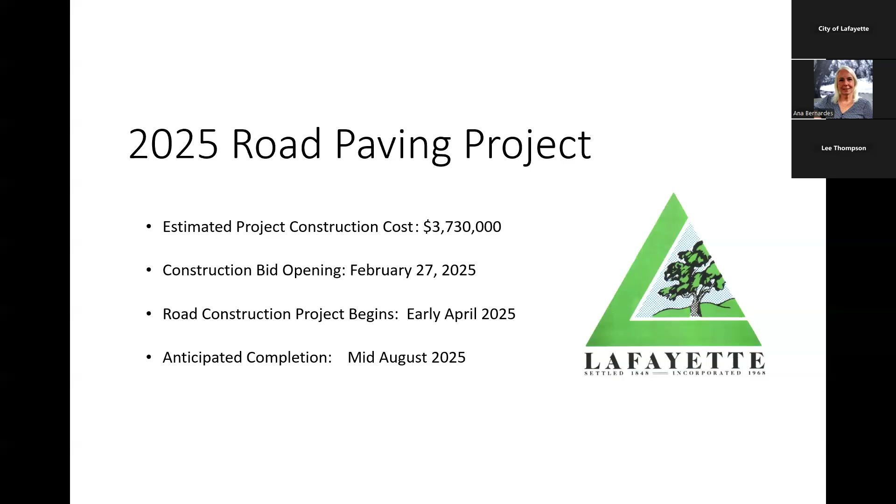This project has an estimated construction cost of $3.7 million. We are going to be paving two major streets, St. Mary's Road and Mount Diablo. We will go out to bid next month with a tentative bid opening on February 27. We are estimating that we will start construction in early April and complete the work in mid-August.

Let me introduce our team. This picture you see is Tim Clark, our associate engineer with the City of Lafayette. Tim will help me on this project. A little bit of a brief about Tim: Tim joined the City of Lafayette in March of 2020 and has worked on several CIP projects. Tim's phone and email are listed here on this slide, but you can also find his contact on the website. Here's Tim on one of the pavement projects he worked on, with level in hand, checking the cross slope.

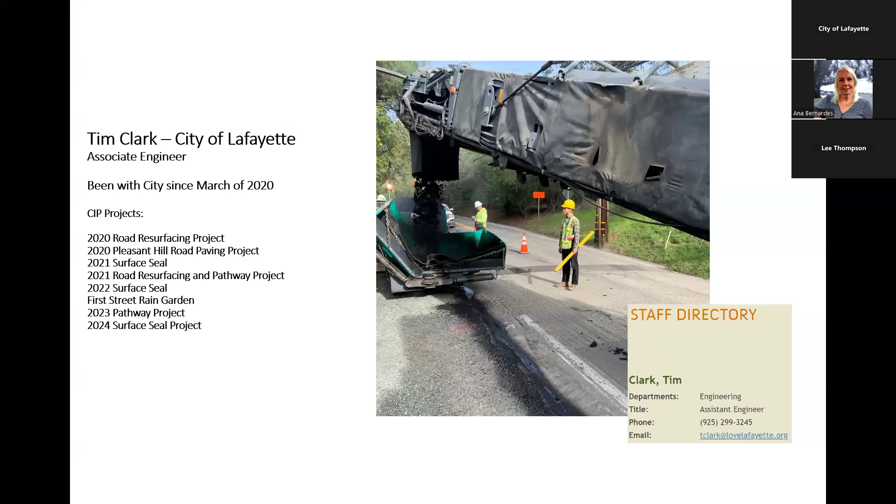So there are two streets planned to be paved for the upcoming summer: St. Mary's Road and a section of Mount Diablo Boulevard. St. Mary's Road was going to be a paving project in 2023, but because we learned that East Bay MUD was replacing their main pipeline in the summer of 2024, we postponed the project to the summer of 2025, the next summer. We already had a public meeting about the St. Mary's proposed improvements back in 2023, I believe, when the plans were at about 25%, and we are refreshing minds with this set of plans at this meeting. The project plans are close to 98% to 100% developed, so we're getting pretty close to going out to bid.

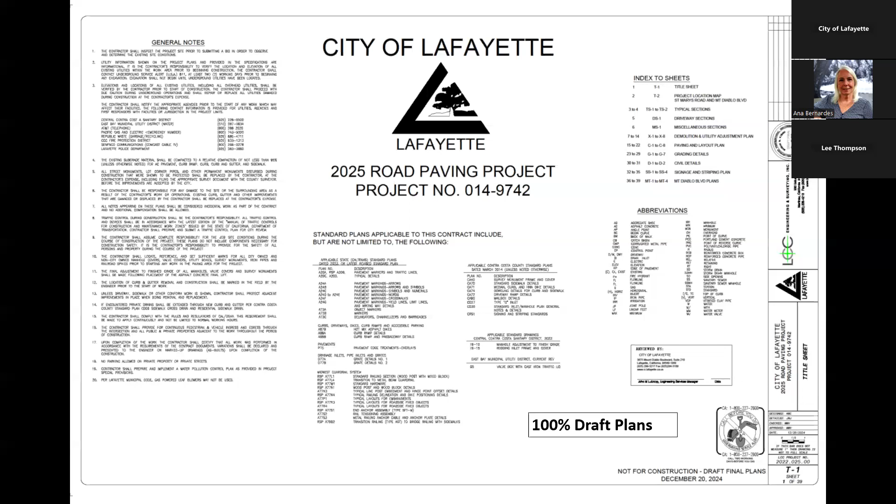Some areas will be mostly overlaid, and that means putting new asphalt on top of the existing one. We are overlaying about 2.5 inches of new hot mix asphalt over the older street. Before you overlay a street, there's some prep work that needs to get done. This involves identifying the areas of severe pavement distress and marking the road where we will need to do a repair deeper than the 2.5 inch overlay. If you drive on St. Mary's tomorrow, you will notice a lot of white paint demarking these areas of future dig outs, or what we call base repair. During construction and before the overlay is laid, the contractor will grind these areas and fill them in with new hot mix asphalt.

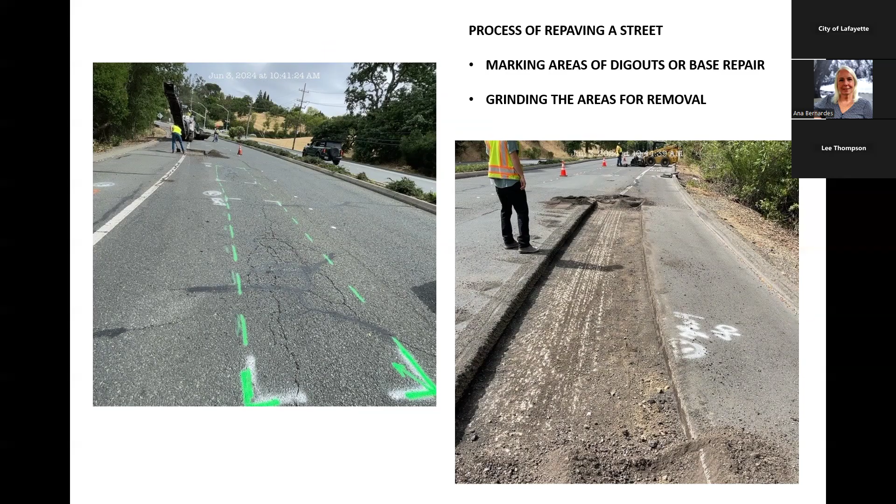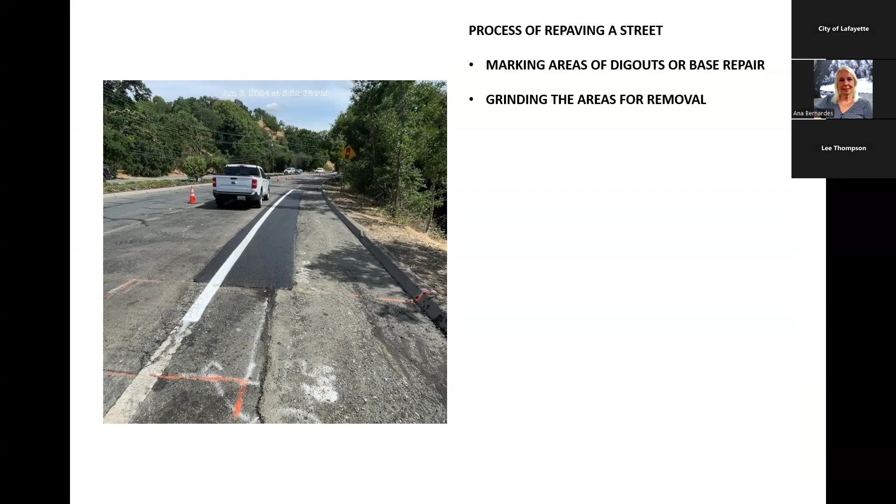I selected some of these dig outs from our project last year on Pleasant Hill Road. In this slide, you have a dig out where the contractor has backfilled with new asphalt, and he has also placed temporary paint striping. So it's like a sequence of the previous one. Before you overlay a street, some prep work needs to get done, like grinding off the existing thermoplastic striping. In the picture on your left, this was the contractor removing the stripe. You can see the stripe almost gone there. It also involves filling in fine cracks in the road, what we call crack seal.

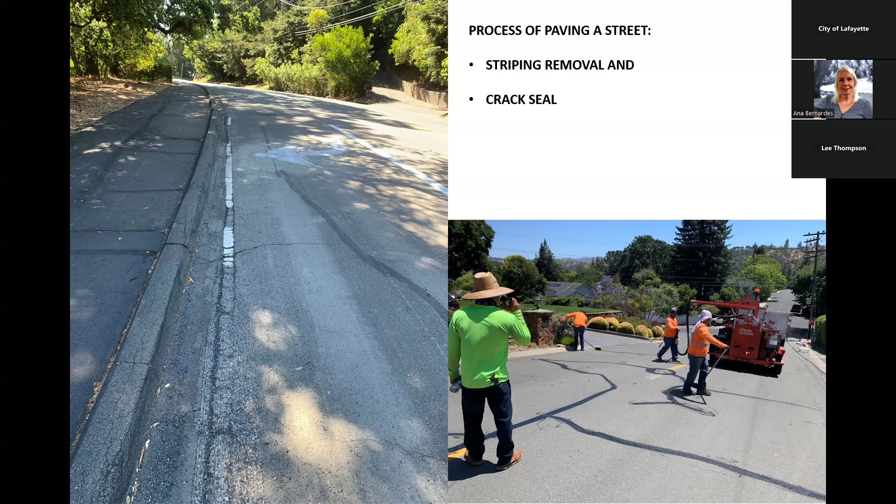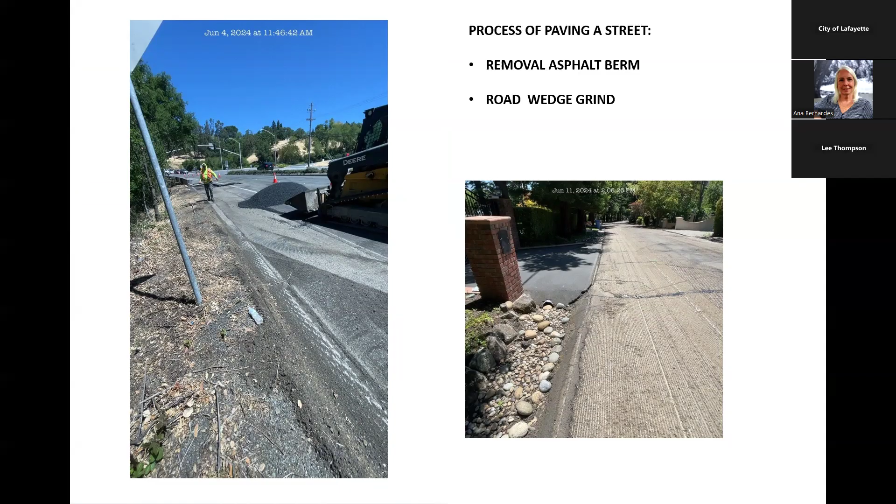Before overlaying the road, we also remove the existing asphalt berms and sometimes do a wedge grind adjacent to improvements that we will not change, and we will conform and match the elevations. So your left picture shows an asphalt berm that has been removed. And then on your right, you have the wedge grind that we did on Pine Street adjacent to improvements that we're not going to touch.

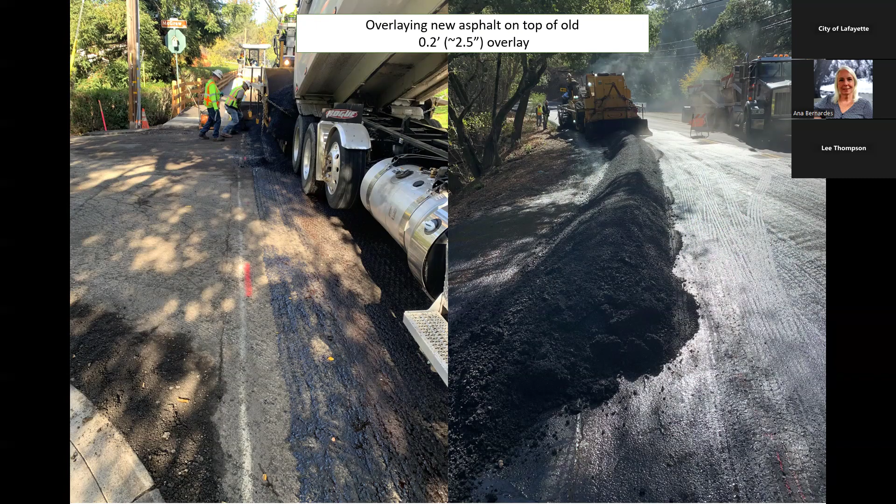So after these steps, we can then overlay the existing asphalt with a new hot mix asphalt layer on top. A sticky tack coat is laid down before adding the new asphalt to adhere to the road surface. So you can see in the picture, normally we have heavy machines, trucks dumping asphalt where the pavers spread it out over the oil surface.

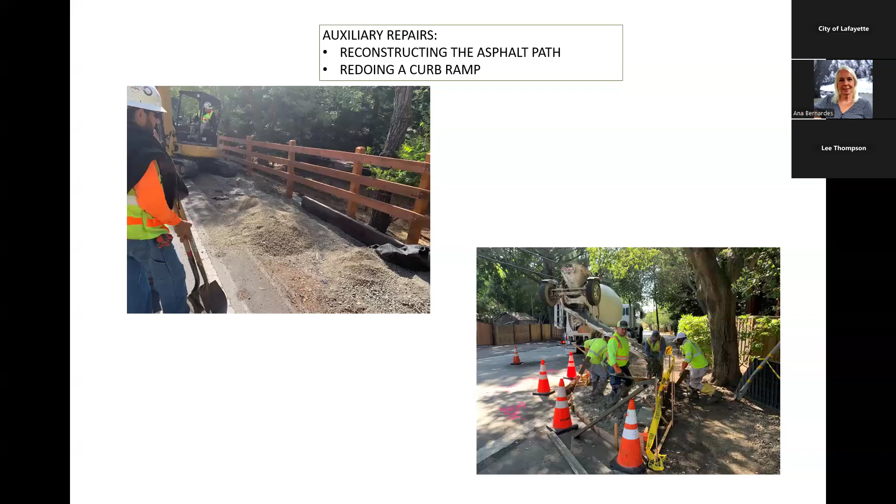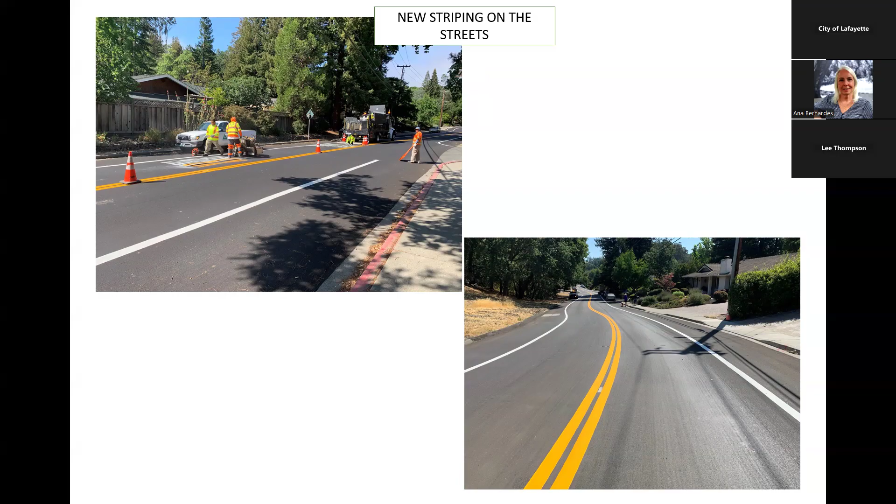And once that is all done, we can stripe the road. So once you have a brand new overlay road, the contractor normally cat tracks and marks the future design striping. And then he also works to pick up miscellaneous items and wrap up the project.

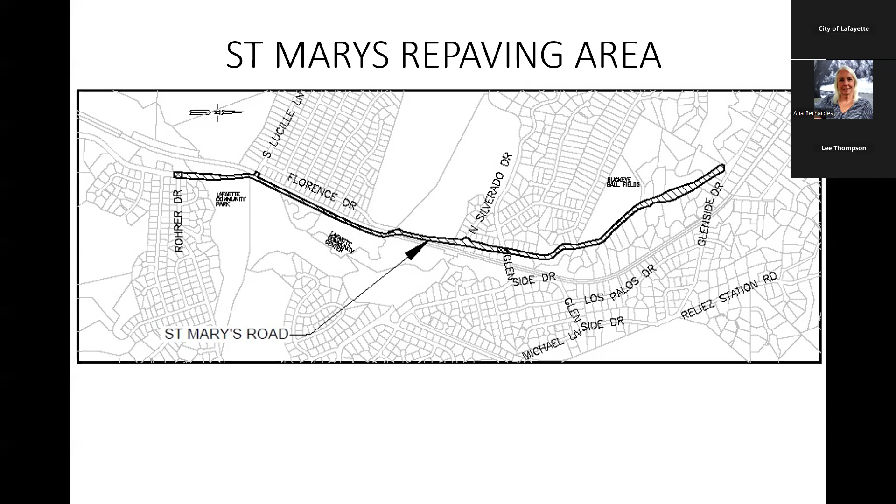In addition, because we do have a bus stop north of that intersection, we're going to construct new concrete bus pads. So a bus can stop right adjacent to this concrete pad, and if there is a wheelchair that needs to be lowered, the bus pad has an ADA surface where this can be accomplished.

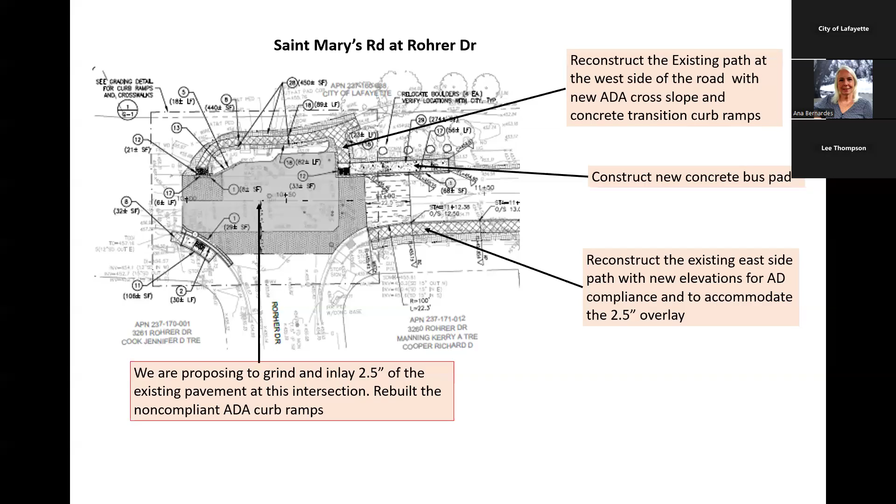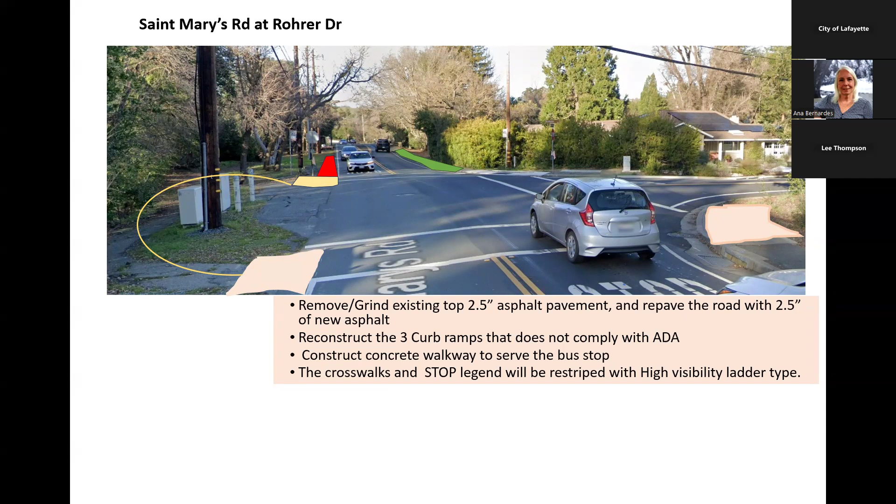So for you to have an idea, I took a picture of this intersection, and we have in green a piece of the path that is going to be redone. The red shows the bus pad, and the tan color shows all three new curb ramps that will be completely reconstructed with new ADA standards. Also, the path I was talking about is the path that comes around these communications cabinets and connects to the west side path that runs along St. Mary's.

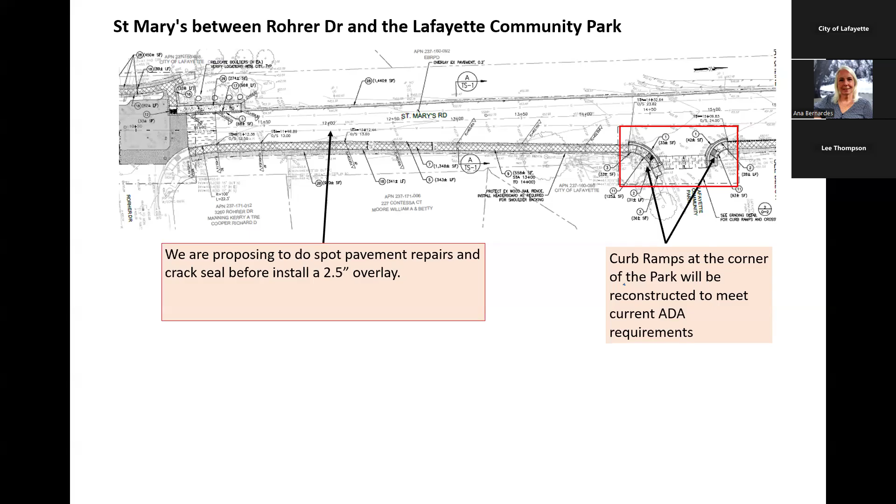So continuing from the park entrance on St. Mary's, south of Lucille, we have a concrete bridge, and our overlay is going to go up to this concrete and then continue on the other side, on the north side. But we noticed that with the overlay, your final elevations are 2.5 inches higher.

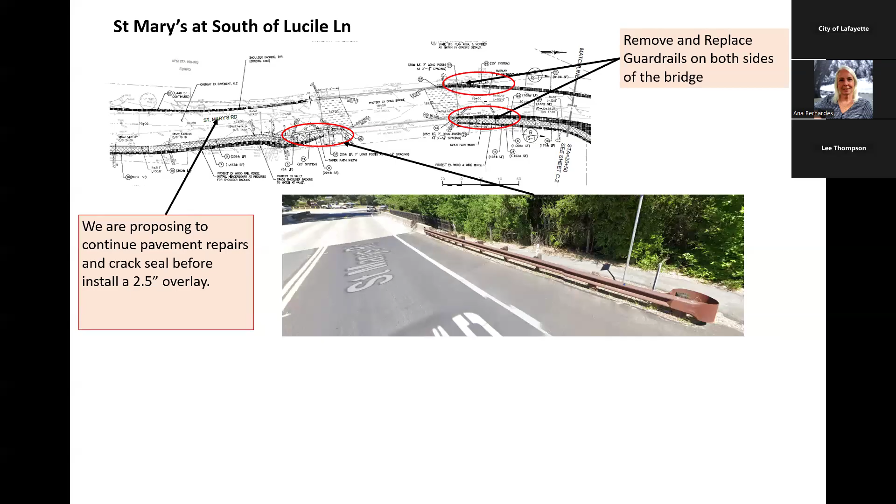So this is a picture of Lucile Lane at St. Mary's, and there's a lot of improvements going on there. So not only are we proposing to continue the pavement repairs and crack seal before installing the 2.5 overlay, but also we're going to construct the ADA curb ramps at the path crossing and continue the restoration of the asphalt path.

So also we have a crosswalk here where we will reconstruct ADA curb ramps. And then this is the path that continues and meets the path over there by Rohrer.

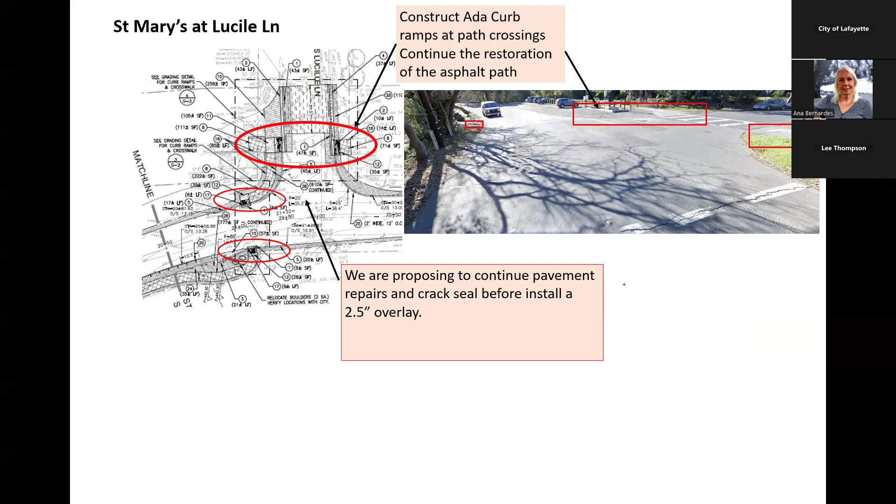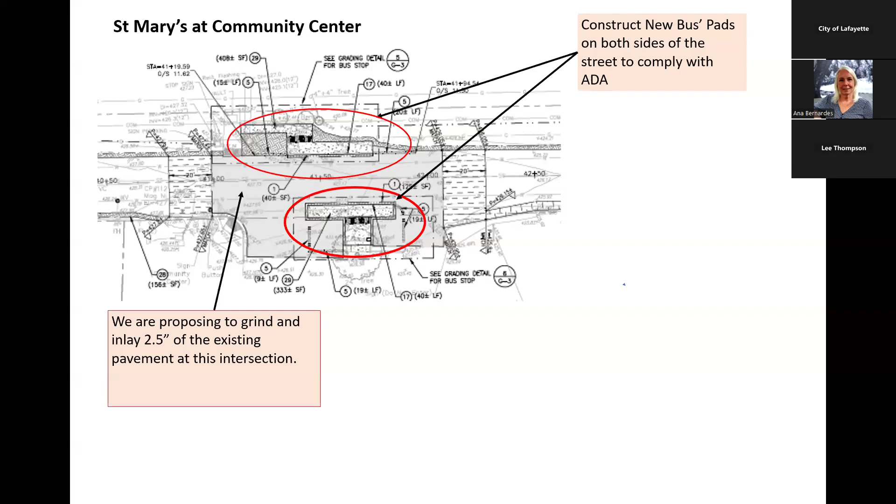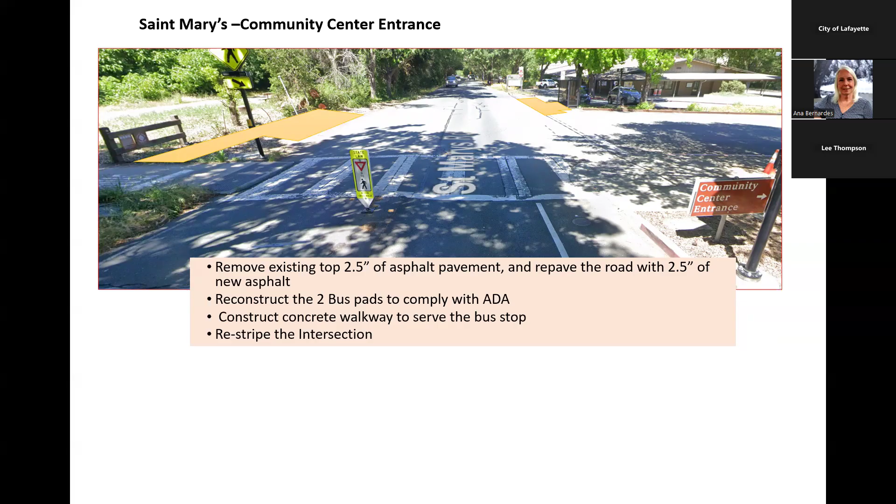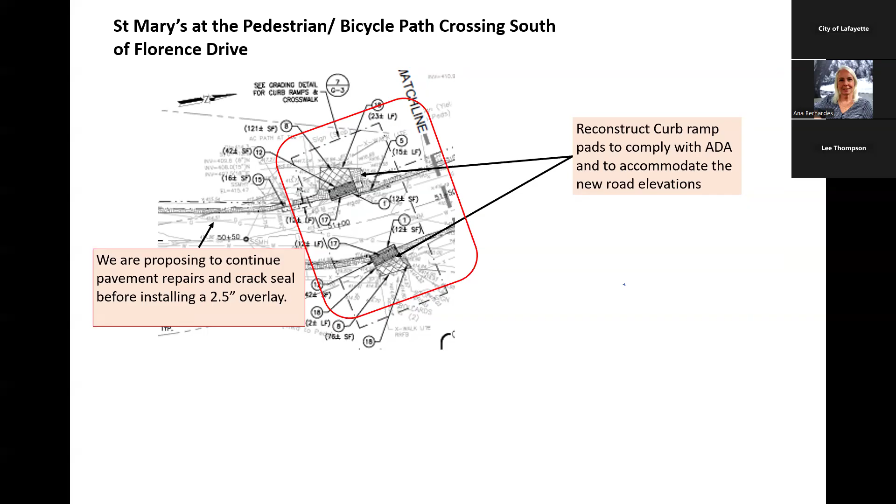So continue north, St. Mary's at the pedestrian bicycle path crossing south of Florence Drive. This is a point where the west path crosses and connects us to the east side. So with the 2.5 inch overlay, we are reconstructing curb ramp pads to comply with ADA and also to accommodate the new road elevations.

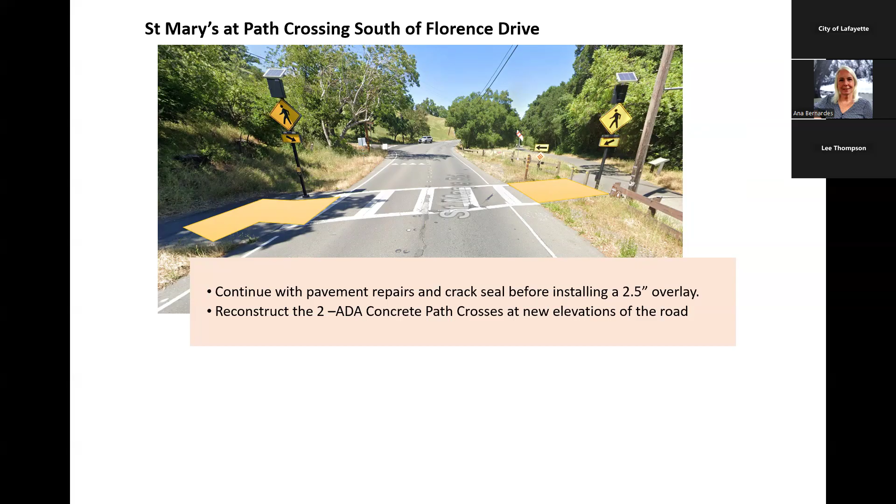So this is again a visualization of the intersection. I'm talking about the crossing of the path, and the sketches that I have exposed over the picture show the future improvements with new ADA concrete curb ramps.

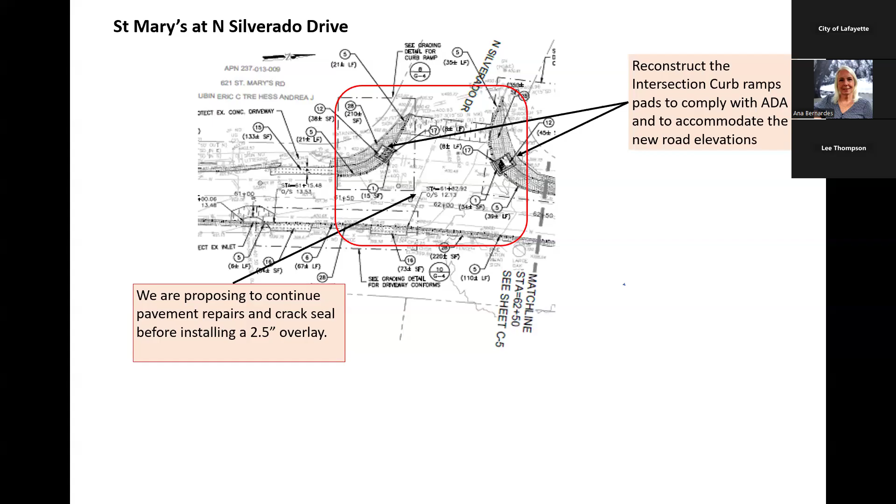So when we are at St. Mary's and North Silverado Drive, again another intersection where we are continuing our overlay, and again in combination with base repairs and crack seal. But we are also reconstructing the intersection curb ramp pads to comply with ADA and to accommodate the new road elevations and connect with the new overlaid path that I'm going to show you in the next slides.

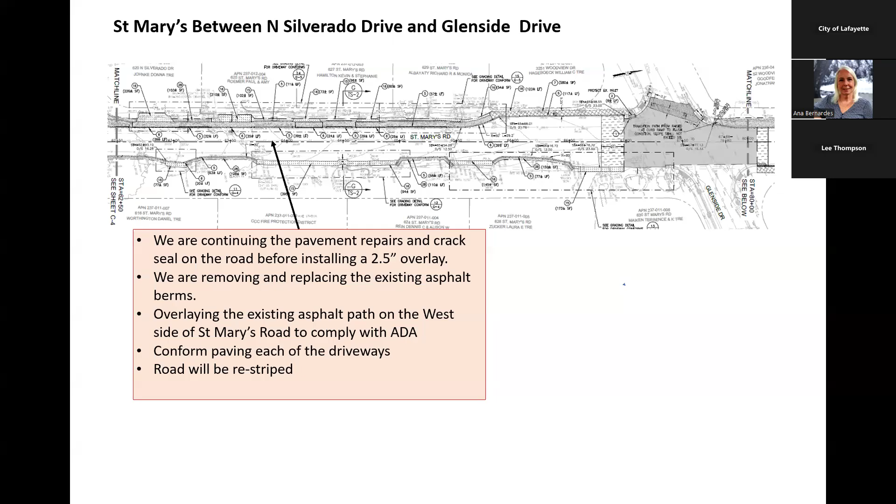As you can see here, this is another visualization. You have driveway entrances. So this is the area that we will be overlaying. I placed a typical cross section so you can understand what we are doing. So this is the overlay, the top 2.5 inches that we are placing over the existing layer. But also we are filling in, installing a leveling course here, so the path cross slope complies with ADA, and it's not more than 1.5% across the slope.

So these are some of the things that we are doing to comply with ADA. So there will be transitions into landscaping and/or driveway conform paving to the existing driveways.

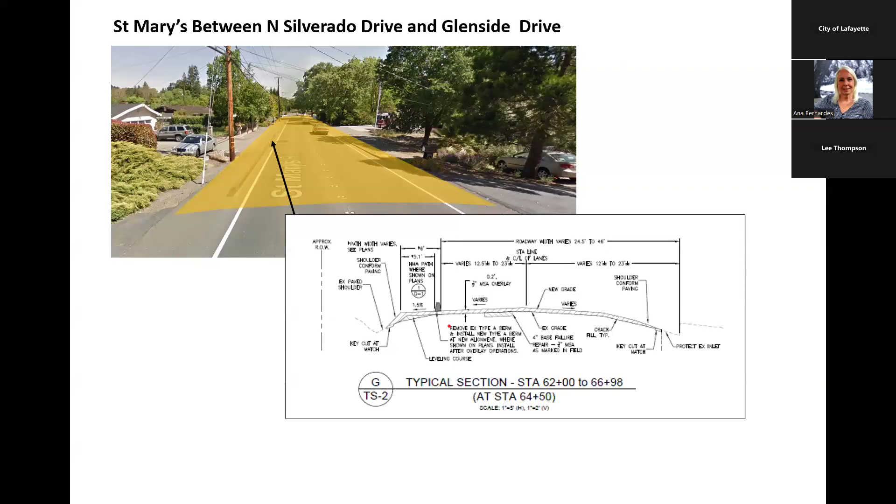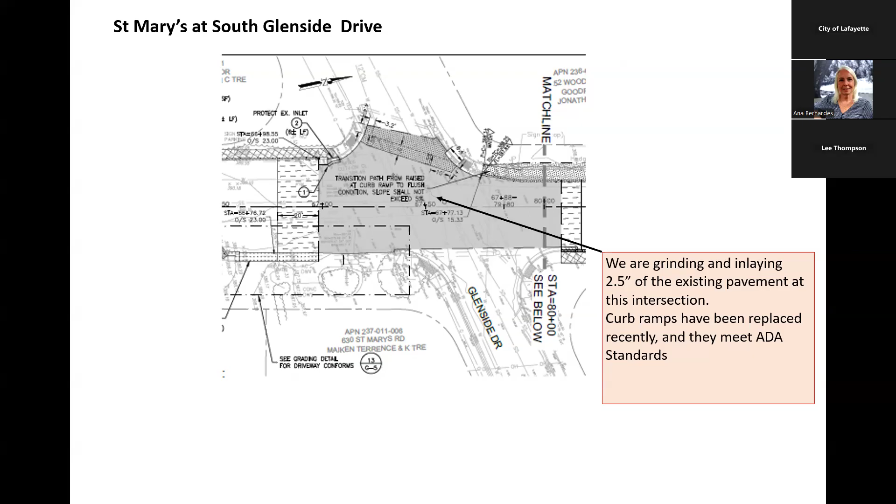So St. Mary's and Glenside Drive. This is Glenside South. We are proposing to grind and inlay 2.5 inches of the existing asphalt. And because these curb ramps have been recently done, the one on the west side and the ones on the east side, we don't have to update these curb ramps to the latest ADA standards. So we'll basically just remove the 2.5 inches and put it back on with a transition to the overlay sections.

So moving north of St. Mary's at Glenside Drive, we are again overlaying the road with spot repairs and crack seal and overlaying the west side walkway with the addition of a leveling course, like the same thing that happens on the previous block. So we end up with an ADA cross slope. We will also conform pave each driveway for the new elevations.

And then I want to mention that there are landscape like bushes and shrubs and trees that have grown out past the existing or design edge of the pavement or pathway, and that they're in conflict with the work. We plan to get these bushes and landscape trimmed back to a point of 1 foot behind the new edge of the pavement or pathway, and to a height of 14 feet above the road. In case some of the plants, such as juniper bushes, exist in the area, this may expose the bare interior of the bush when we do the trimming.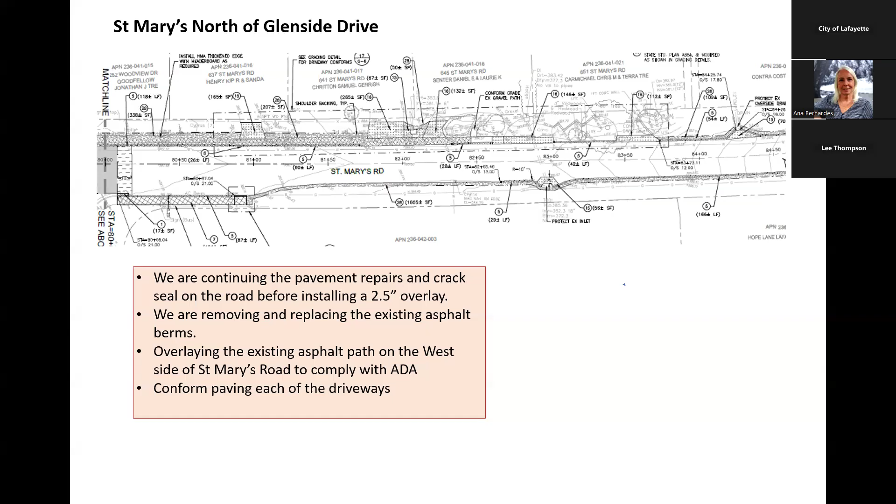If you are concerned about the method to be used in trimming, please get in contact with us. I suggest that you probably hire a landscaper and then do this work in the best way. Normally, pavement contractors are not landscapers, and they just go and cut, and they are not relocating plants or doing the proper care for the trimming.

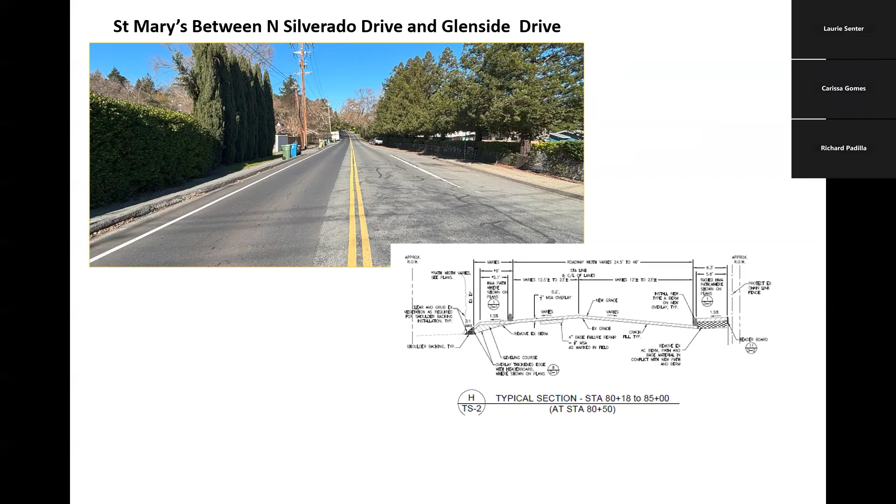So this is again a visualization of the block north of Glenside Drive, and then you've got a typical cross section with the leveling course that we're going to apply to make sure that the path is in compliance with ADA. The asphalt berm will be temporarily removed, and then placed back once the overlay is complete.

St. Mary's at Buckeye Field, so this is going way north past Glenside Drive. Here in front of Buckeye Field, we are doing road repairs and crack seal at the area adjacent to the new East Bay MUD patch before we overlay the 2.5 inches. In the picture on the left, you can see the dark asphalt, which shows the new improvements from East Bay MUD. But on the left side is still the road that has severe cracking, and it will need base repair, crack seal, everything that we needed to do before overlay.

So once the road is repaved, I put a clip of the new striping that you will have there. The contractor for East Bay MUD has painted this left turn. This was almost completely gone before East Bay MUD came there to work, but we worked with them to have this striping done in paint, not in thermoplastic, so we don't have to grind the new East Bay MUD area just to complete the work. So you will see, after we do the dig outs and the crack sealing on the southbound lane and this middle turning lane, a fresh new 2.5 inch overlay and new striping work.

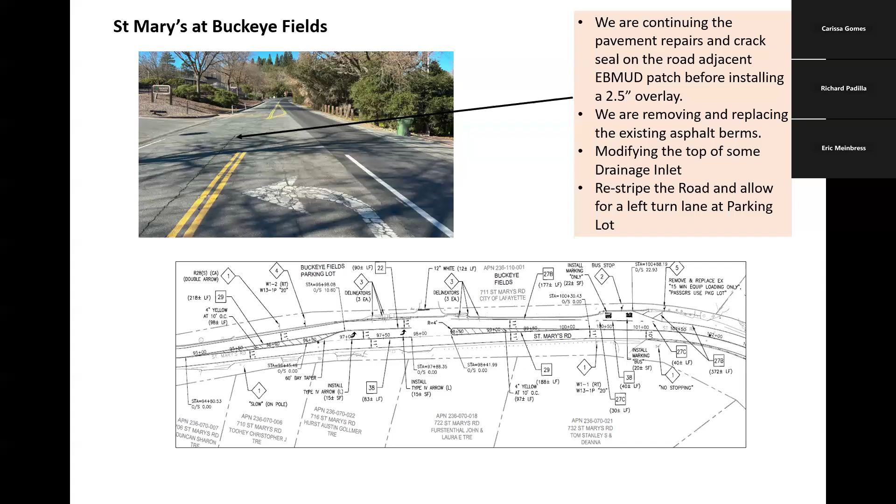So here's the end of our repaving work on St. Mary's, at the second intersection with Glenside on the north side. I did mention before, but between Buckeye Field and this point, we continue overlaying the road at 2.5 inches with asphalt dig outs and crack sealing. We will also remove and replace the two large sections of guardrails to comply with the new safety standards and conform pave at each driveway to provide access to the new road elevations.

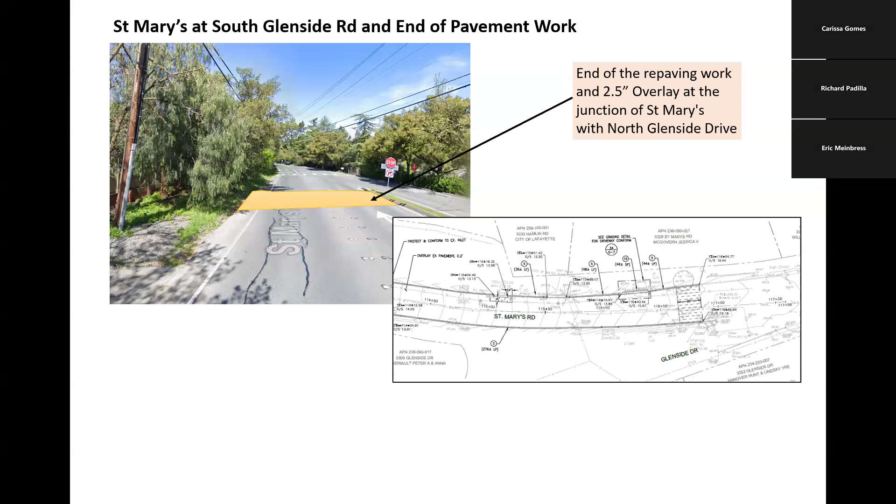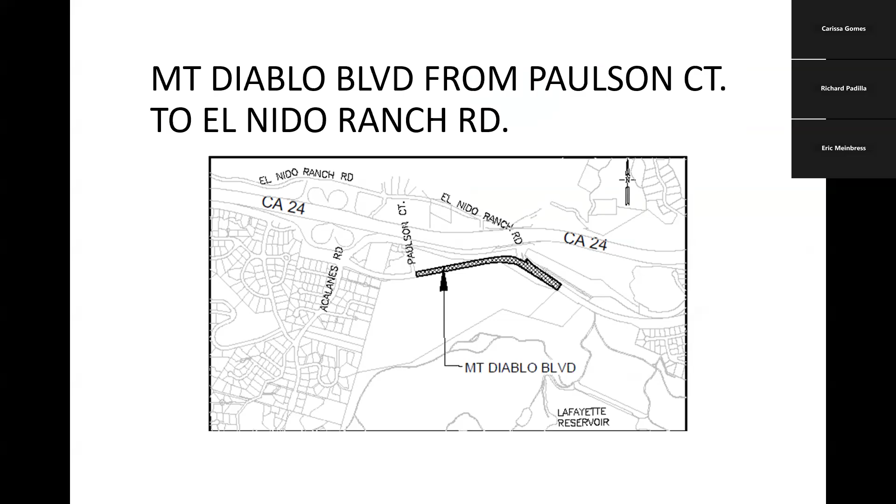So this is our last slide on St. Mary's, and I'm going to jump now to Diablo Boulevard. We're going to repave Diablo from Paulson Court to El Nido Ranch, as you can see in this hatched area of the local map. To simplify, this is a typical cross section of what we're going to do. Diablo has existing concrete curb and gutter that are in good condition, so we will match the existing elevations on both sides, just doing grinding and inlay work. There will be work on both the westbound and the eastbound lanes.

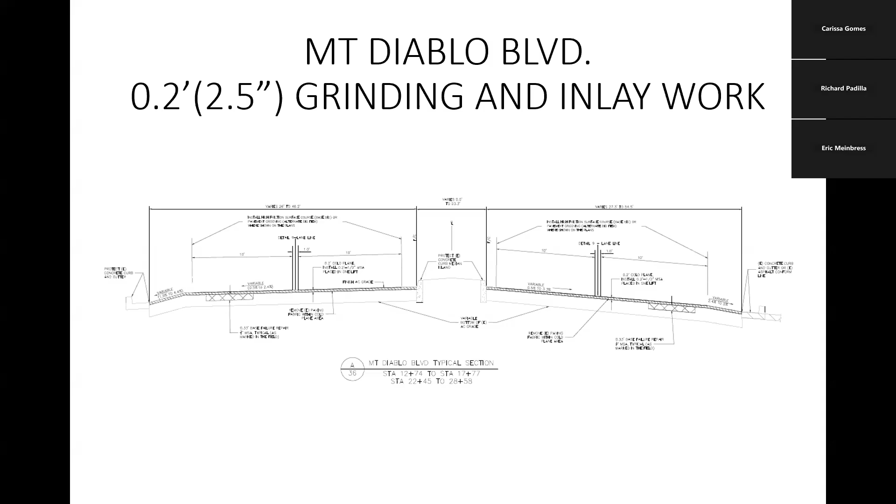So once we repave the road with our grinding and inlay, we will restripe the road with new high visibility crosswalks. That's the ladder shape that calls more attention of vehicles to crosswalks. And then the green bike lanes that we're going to be adding at the intersection of Paulson Court.

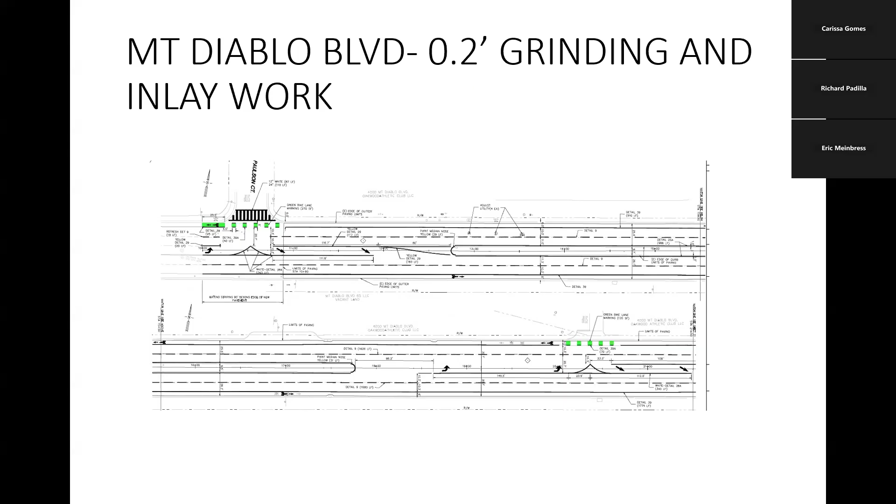And with also striping, fog striping that we will install along the center median to improve visibility, especially during the nighttime and with limited lights that we have at this location. So this is the proposed new striping at the intersection of Mount Diablo at El Nido Ranch. You can see that we are doing high visibility crosswalks on all these 4 existing crosswalks, and we're installing also green bike lane along this intersection to call attention to the bike lane, and then there's several different movements of vehicles there.

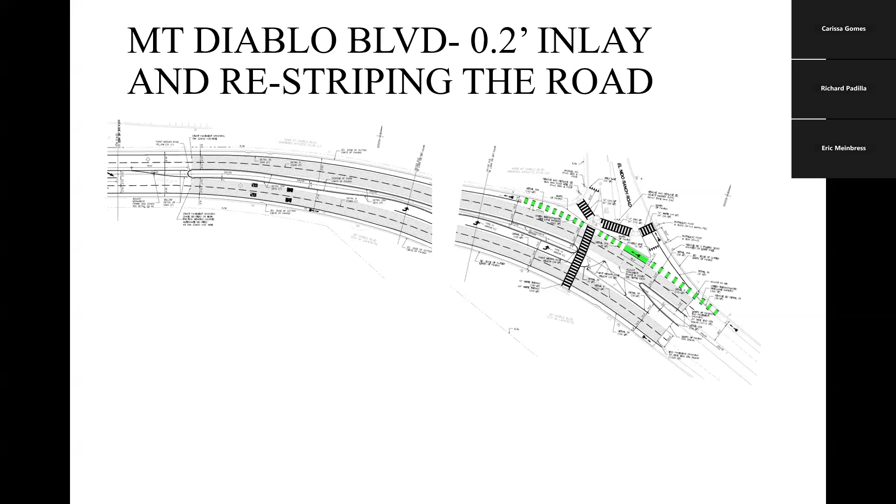Also, this shaded area that you see on these plans is for high friction surface course that we will apply to the road 30 days after we complete the inlay work. And this is to replace the existing asphalt grooving that we have on this same location. This was installed a few years back by the city to provide more stability of vehicles on the horizontal curve.

So we're going to talk about some of the disturbance that both of these projects would cause to the residents that live in the area. So here's information about lane closure and lane closure hours. And this applies to St. Mary's work and also Diablo Boulevard. So we will allow lane closures between Monday and Friday. But emergency vehicles will be provided with immediate access to the construction area.

We have 2 schedules. During the school recess, so when the schools are on summer vacation, that goes from May 20 to August 11, we allow the lane closures to be between the hours of 8:30 and 4:30 from Monday to Friday. Before that time and after that time, the lane closures are reduced to the hours of 9 a.m. to 2:30 p.m. from Monday to Friday, excluding holidays.

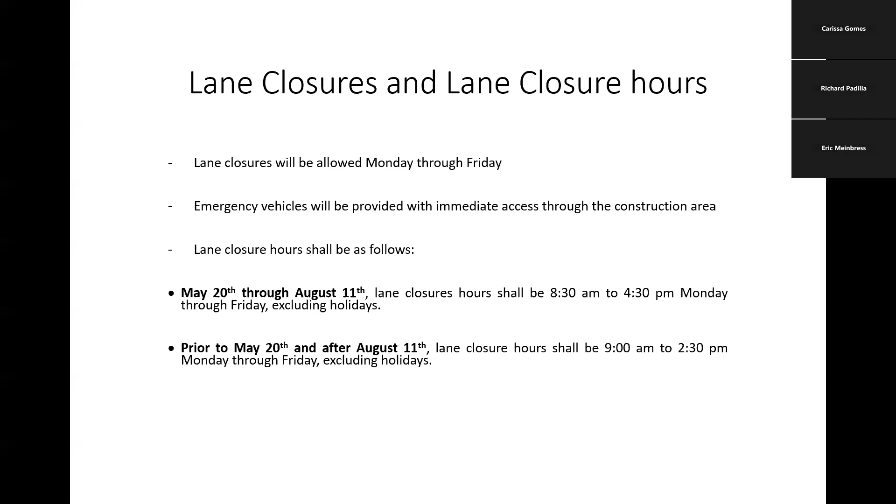Road closures will be allowed on St. Mary's during the pavement repair, crack sealing, conform grinding, and paving operations in segments. And the contractor will only close one segment of the road at a time as follows. So we have segments on St. Mary's between Rohrer Drive and Lucile Lane, Lucile Lane and Florence Drive, Florence Drive and North Silverado Drive, North Silverado Drive to Glenside Drive on the south, and Glenside Drive south to Glenside Drive on the north.

Of course, for each segment that we close, the contractor will provide detours and signage to direct the drivers to use alternative routes. Access to driveways on these closed segments will be restricted for non-emergency vehicles during the time the wet asphalt is being placed. But again, emergency vehicles will have access through these closed segments throughout the project. This is similar to what East Bay MUD did when they were doing their project. So you would probably expect the same segment closures and traffic detours and delays.

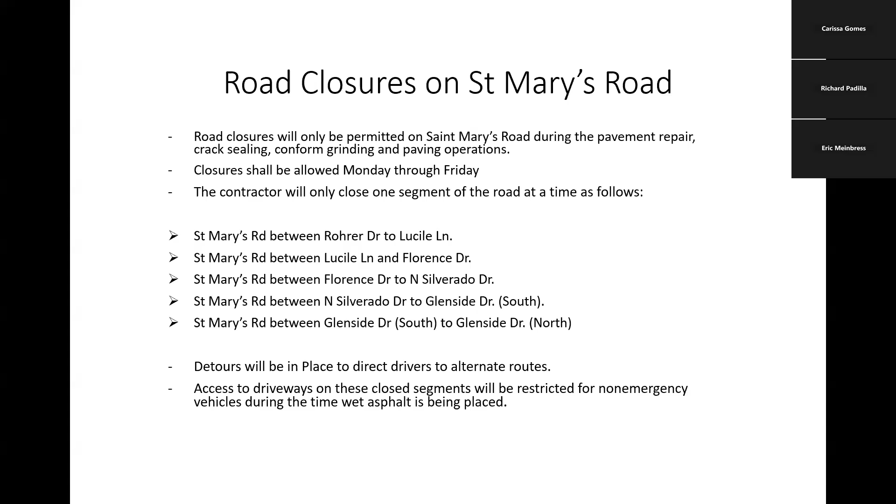So every Friday, either me or Tim will put together updates with information on what has been completed on the road that week and what will happen the following week. I really encourage the residents to check out these Friday updates on our City of Lafayette website to stay informed about the road work that they can expect in the coming week.

So, residents' homework. If you're worried about your frontage, landscaping, or improvements in the public right of way, or you would like to see more details of the conform paving that we are proposing in front of your driveways, here's either Tim's email or my email that you can reach out to us, and then we will provide more detailed information about your specific driveway and this conform paving. So if you have any questions, we are open now.